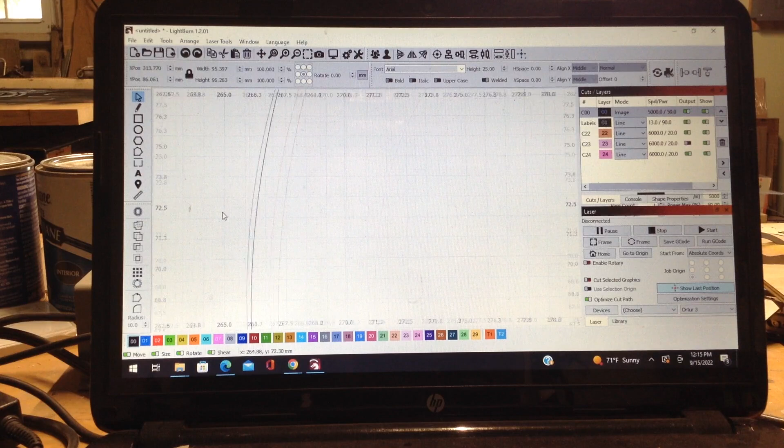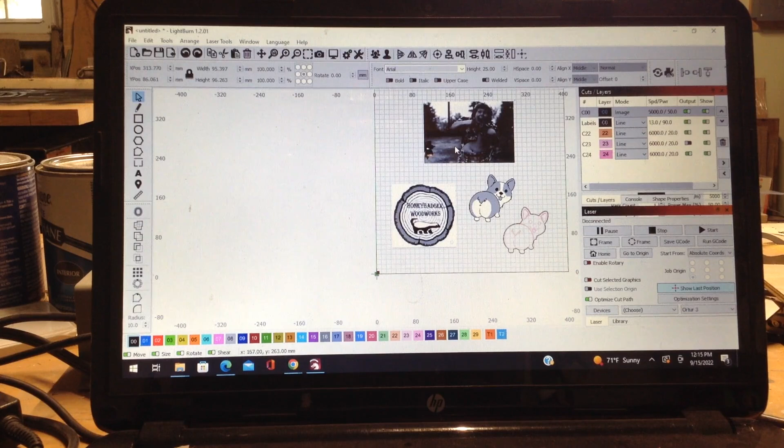This corgi I cut a little bit later, you can see when I zoom in, all the lines are smooth, there's no curves. Even on this other corgi, which is a PNG that I engraved as well, zooming in it's much smoother than the JPEG, which starts to get pixelated right about here. I did have success engraving this, mainly because it's such a simple image. But if you try to engrave this JPEG, a picture from the Goonies I just happen to have on my computer, you're going to have to do some tweaking. It won't just engrave right from importing it into the program.

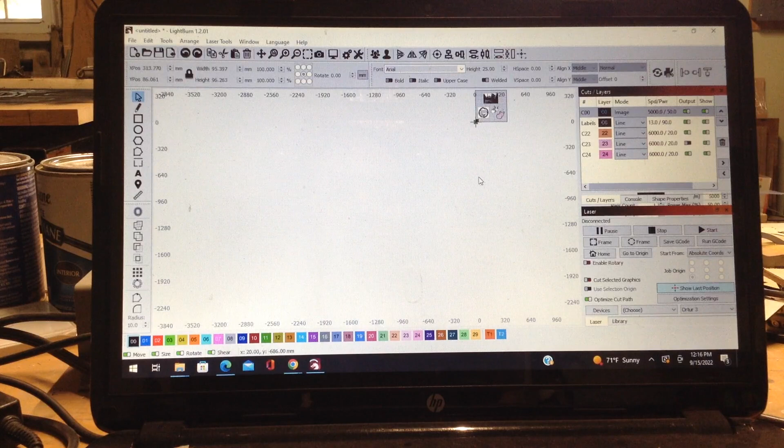But for both of these lasers, I imported this file. It has some background information which I could have deleted in Photoshop, and it came out with a very nice engraving right off the bat, no changes to it. That's basically what that looks like. So that's engraving. If you want to engrave a photo like this, I'm still getting used to the controls. A photo like this, you have to do some tweaking.

It's a little bit outside the realm of this video since I don't want it to be super long, so I'll put a link in the description to how I learned to do that. Basically that's going to be a matter of, you could do some adjustments outside the program, but you click on adjust image and play around with all these settings to get what you want. The most important setting is figuring out your resolution. If you put your resolution too high, it will blur the image; too low, it will also blur the image. For example, when I went to engrave photos, this is an example of all my tests, and it took a while to get this one, which is actually a fairly good engraving for a laser engraver on wood.

That will be in the video, and I learned all that through another rather long video. So that is basically going to be engraving pictures.

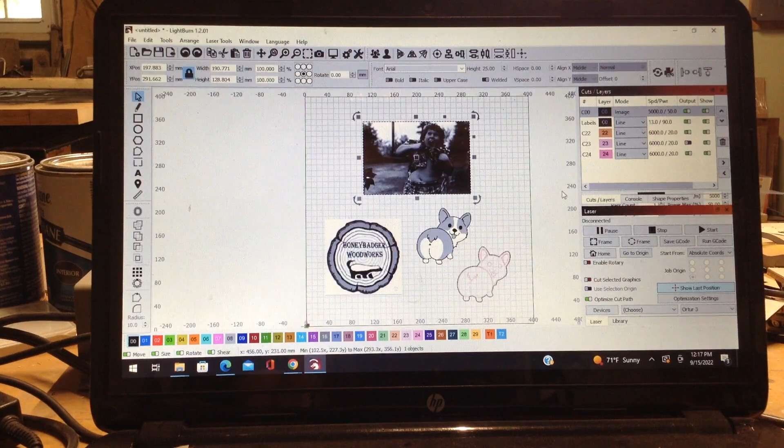So then another thing people are going to want to do is cut things out. On this image, I could double click it and then trace it. The tracing will create an outline essentially of your image. Click OK, and then there is my outline.

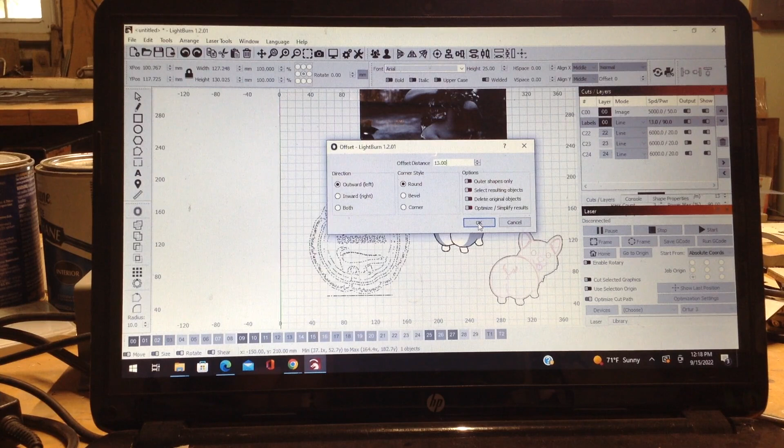From there, I could double click again, and this bigger O over here will create an offset. You could play around with all of these settings. I'm just going to click OK for the purposes of this video, and it creates this offset around the whole side.

So my cut layers is going to be a little confusing because I have all these images open. But basically what I did for this then was I clicked on my outer layer and changed it to a different color, and set that as line over here. So that will cut now instead of fill.

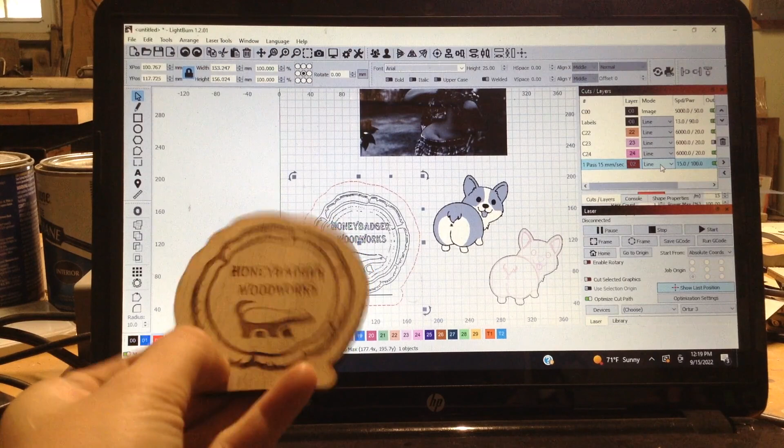And then just simply by doing that, I was able to make this. Now the engraving on this isn't as crisp as the original, and that's because this one over here took quite a bit of time to cut. So just for simplicity's sake, I lowered the detail on this one because I was mainly testing the cutout. This is 1/4 inch ply, and that worked really well.

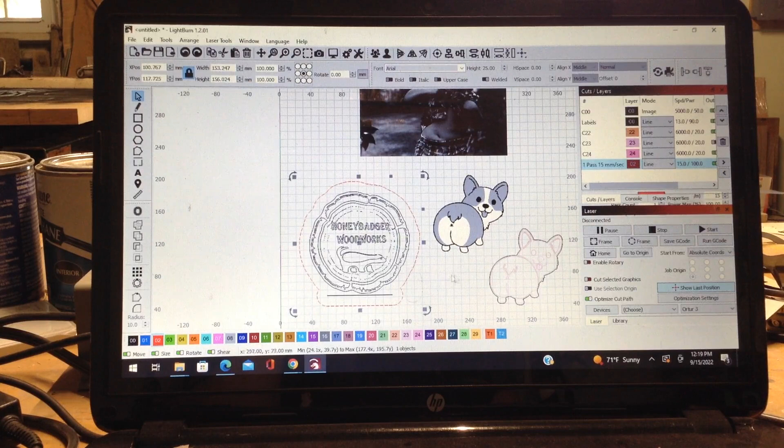So if you want to simply cut out a logo, it's pretty easy to do. So then for when I did the corgi, which you will also see in the video, I did end up engraving this image right here to get the detail, and that turned out like that.

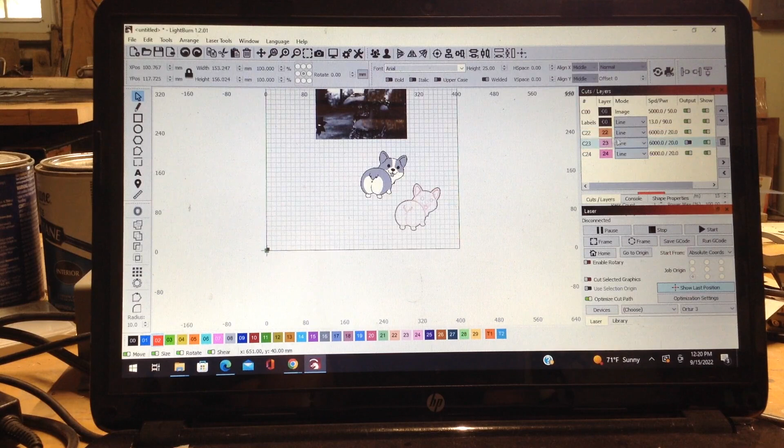But this file also came with this SVG, which is the one with the smooth lines, and you could see if I delete this and delete this, this is the information for the corgi. You could see that they have the files set up to a couple different lines.

It will cut at a couple different speeds and create that image as well. It's a little hard to see, but when you zoom in, you could see they have a very faded line creating the entire image right there. So that's basically the gist of importing images and cutting stuff out.

So a couple other things, I mentioned this in the other video. I bought this laser test file kit essentially off Etsy. It was only $4, and instead of doing this all myself, he has it laid out so that you could see all the test files. You could import them right into the program and test on all of your materials.

Every time you change a material, it's going to have to be tested to see how well it cuts, how well it engraves, and the speeds and settings for all of that. This takes the guesswork out of all of it. So you can see he has an engrave test as well, and then a grayscale test if you want to start dealing with going through multiple layers of color to reveal other colors.

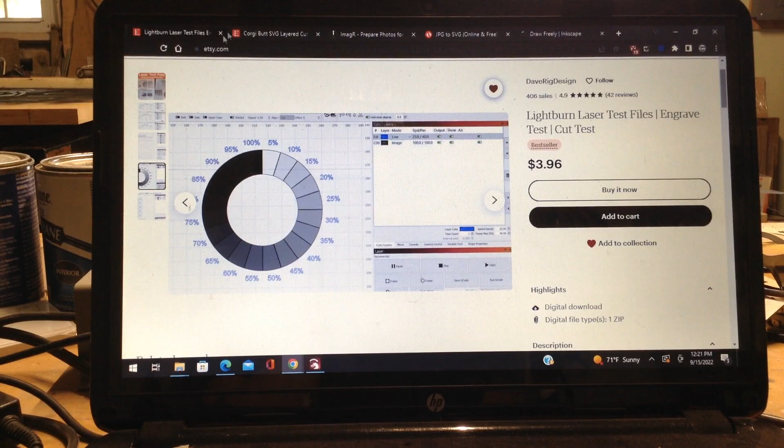Like I said, you could buy files if you don't want to get involved with making them yourself. Etsy is full of files. That's where I bought the corgi. It comes with the SVG file, make sure there's that. But like I said, the one I ended up engraving was actually a PNG.

You can get away with engraving JPEGs and PNGs if they're low detail images. If you do have an image, and I've done this with my vinyl cutter, this website, Convertio, will convert JPEGs to SVGs. You can only upload, it says right here, 100 megabytes, and then I think it only stores a certain amount for you, and then after that you have to buy the program.

But I've been able to use it for free on a couple files. It doesn't always work, and there's other ones out there that are free that I don't find work at all, but this is an option. I did this on another project where I had a JPEG and I needed to convert it to an SVG, and that worked really well.

Like I said before, this is Inkscape. This is going to be what I'm going to start playing around with to try and draw some of my own stuff, because buying images off of Etsy forever is not really going to work for me.

For now it is. But like you can see, especially with low detail images like my logo, I was able to come into this program, build the laser, come into the program, and have these initial cuttings, my logo, this cutout, and all of that in an afternoon.

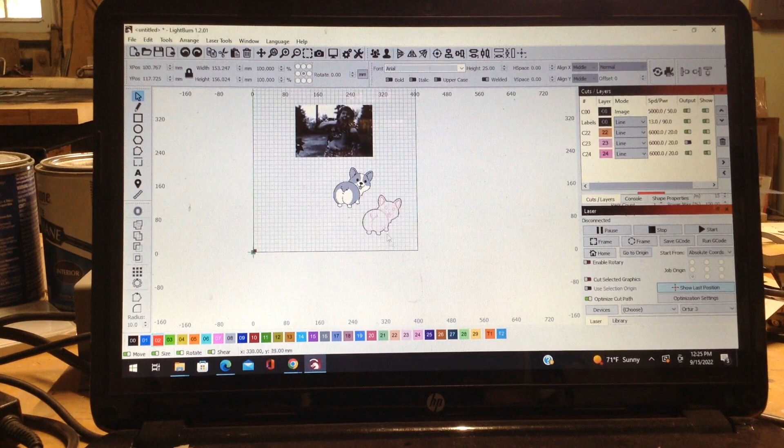So it is doable, but you can also see, even making this corgi with the multiple lines as a vector image is outside of my realm of capabilities right now, but that's something I want to change. You could get pretty advanced with how far you take this, but you can also do simplistic things without needing to know a bunch about computers.

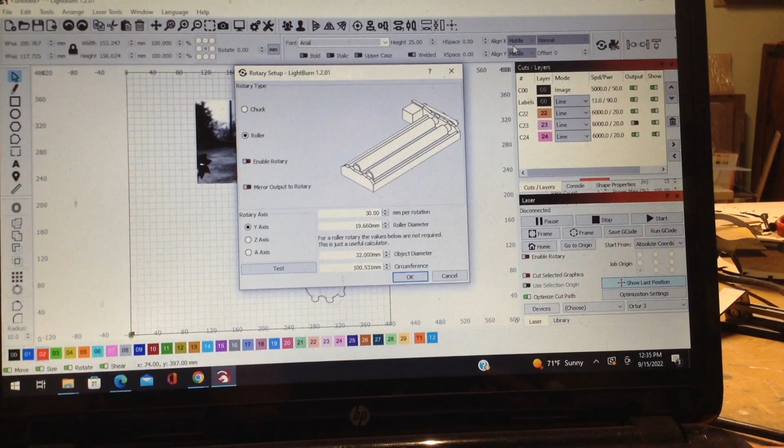It can be a rotary cutter. There's a little icon up here, and you have to enable the rotary. Luckily on the Ortur, it's just a switch that you flip, hook up the rotary tool, and flip a switch. The main thing you're going to be messing with is your millimeters per rotation.

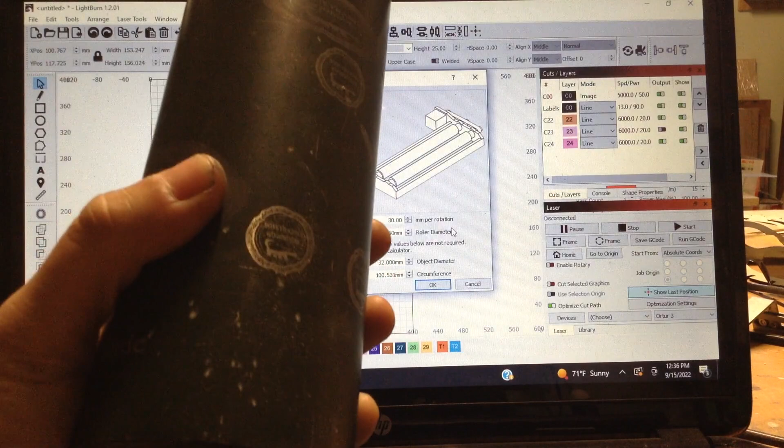If you don't get that right, you could see it had a big image, and then you can see how it stretched out here, and then finally I got it right by messing around with this number. You also need to know your roller diameter, which I use calipers to get, but once you have that set, that will be set forever unless you get a new rotary tool.

And then you need the object diameter, which is a very simple measurement, and that automatically calculates the circumference for you. Then it's just a matter of plugging those numbers in and doing a couple test cuts. That is the process in and of itself.

I'll be going over rotary cutting in the video, but once again, I'll be putting links to much longer videos. It can be a little daunting that you have to watch all these videos in order to learn the program, but there are just so many capabilities of it.

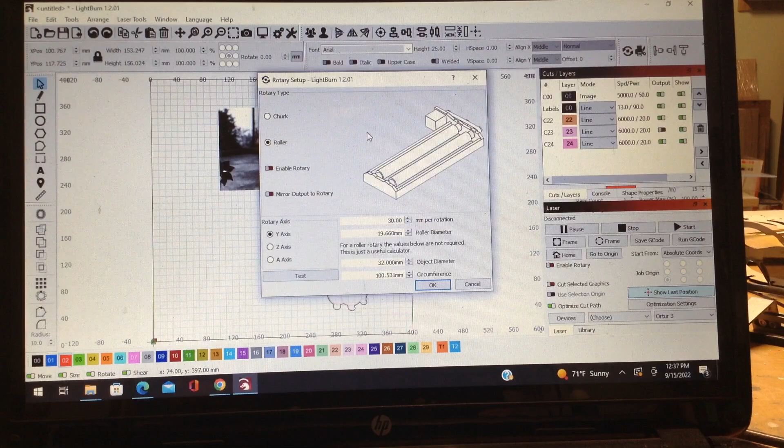I did find just sitting down and spending an afternoon with YouTube was much more useful than trying to mess around with it myself, because you have people that have gone through the process of trial and error, so that you can kind of avoid making all of these mistakes before getting the one that you want.

So I'm not going to do a big unboxing and putting this together. The internet's already full of videos showing that.

Essentially, they sent me a bunch of stuff to accompany this laser. The packaging was really nice. All the tools even came in a little box.

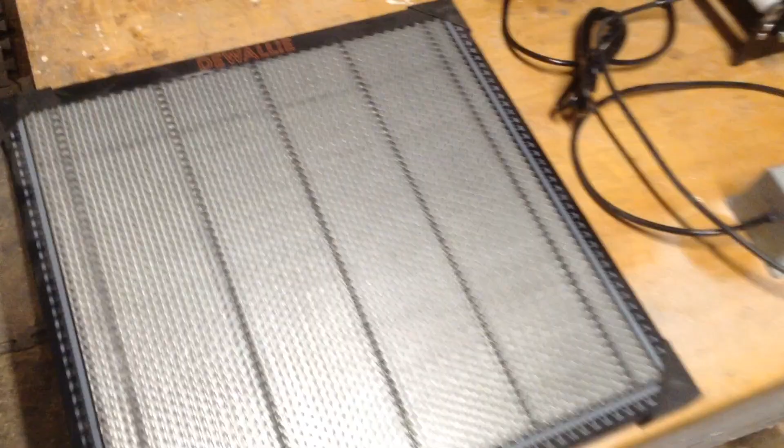All the instructions are online, just like the other laser, which I don't love. It saves paper, but when you're using your phone and your computer to try and run a program and read instructions, it is a little bit of a pain.

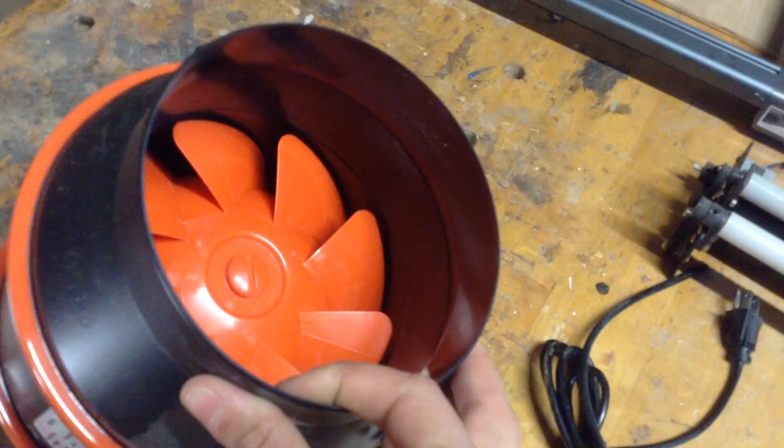They also gave me a honeycomb bed, which you need something underneath of this, especially when you're cutting. That just elevates the piece, gets air around everything, and makes it a little more efficient at cutting. You can DIY those, you don't have to necessarily buy one.

They also gave me that big venting fan, which you saw, this air assist, which gives a nicer cutting effect because it helps remove the smoke, as well as a rotary tool. So I'll be using all of this stuff in the video.

All this stuff comes with clamps and whatnot to hold it down, but I won't be setting that up yet until I permanently decide where I'm going to be putting all of this stuff.

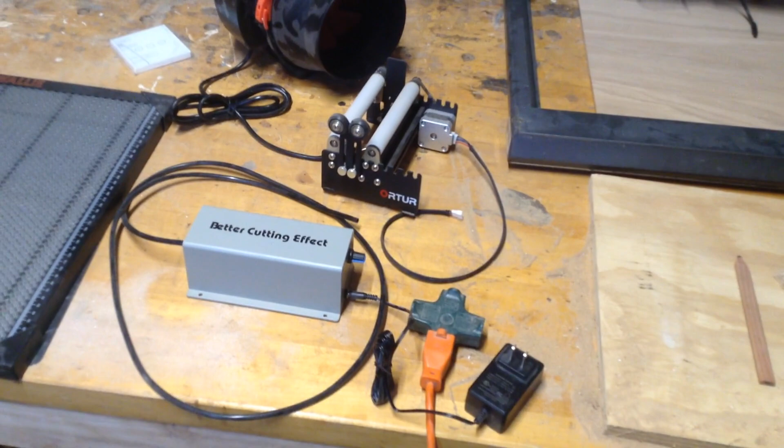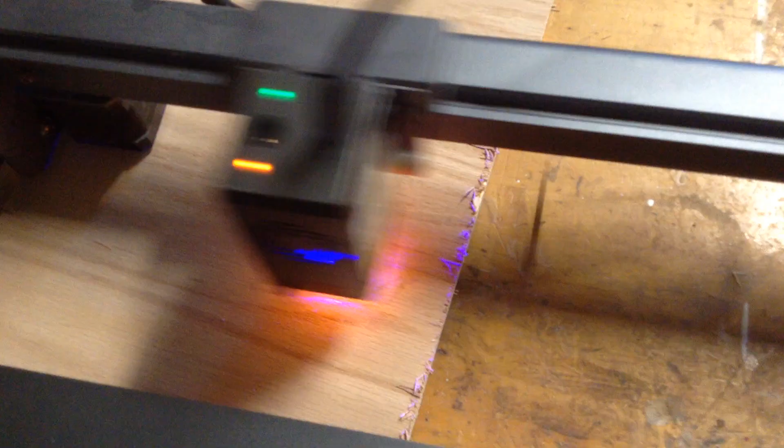So like I said, this is initially starting the piece. Unlike the other laser, this one actually has a homing setting, which was nice, but I basically just imported my logo and started engraving. As you can see, the settings I originally had were not dark enough, but it did engrave the image. So this was really where I started learning and processing information, because I knew it wasn't going to be as easy as just importing any sort of file and making whatever I wanted.

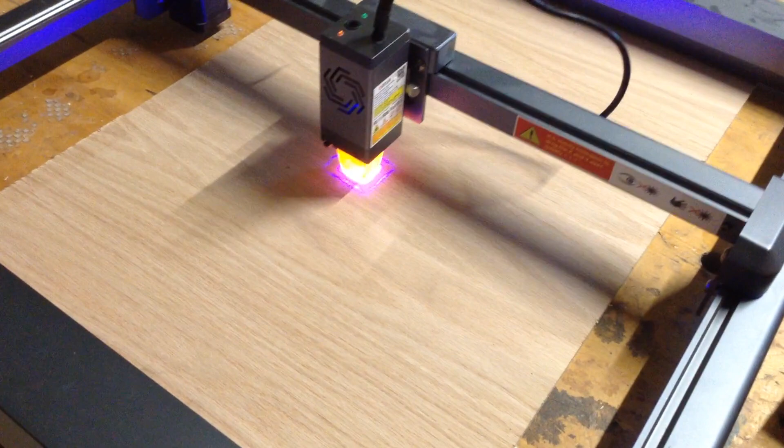So in the program, they do have a material test that you can use. That is what I used at first. I did upgrade to that Etsy program I showed you, because it does test a couple other things. But these initial settings were really useful to get me up and running.

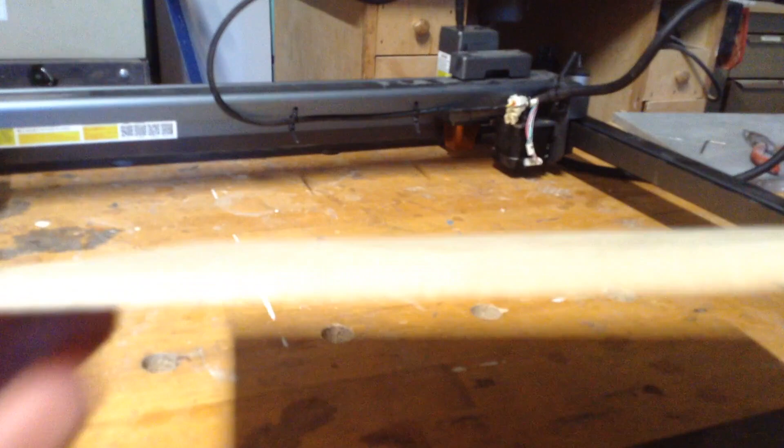You can perform the test on the tool. You could see it shows you what power and what speed to set, and then that will help with the initial settings. I tried it on birch and pine as well, just to kind of get an idea of how this would work.

Obviously the pine, because it's the softest of the three woods, you can see there's a little bit more of the grid showing up, but in general they were all quite similar.

Like I said in the last laser video, a lot of this is just going to be fine-tuning your settings. Those are going to be specific to the program you're using, what you're cutting on, as well as your laser. So I'm not going to input a ton of information here about my settings, because they might not necessarily work for you. But with those tests, or the tests I have on Etsy, you can set your initial settings.

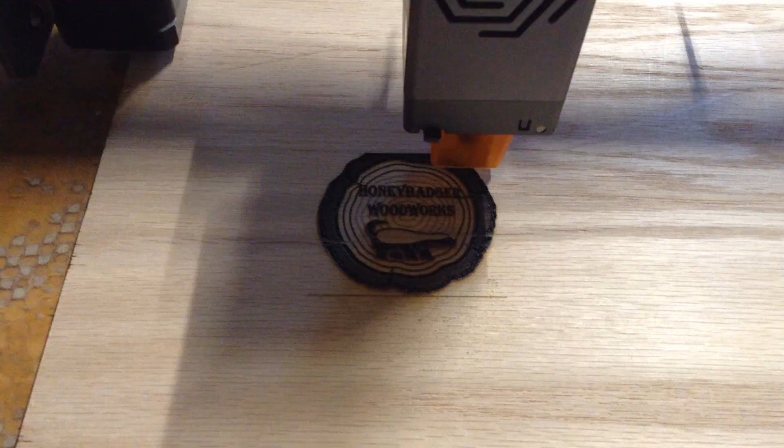You'll see the difference between running that test and then engraving that logo is huge. Obviously this is oak I'm engraving on, so the grain has a lot of texture, so that shows up in the pattern.

But in general, I was really surprised by how well this worked and how much detail it did actually render. So then, like I said in the intro, the next thing I wanted to do was test on cutting, because I am planning on cutting a lot of stuff on these machines. So that was just a matter of tracing the image and then making an outline for it.

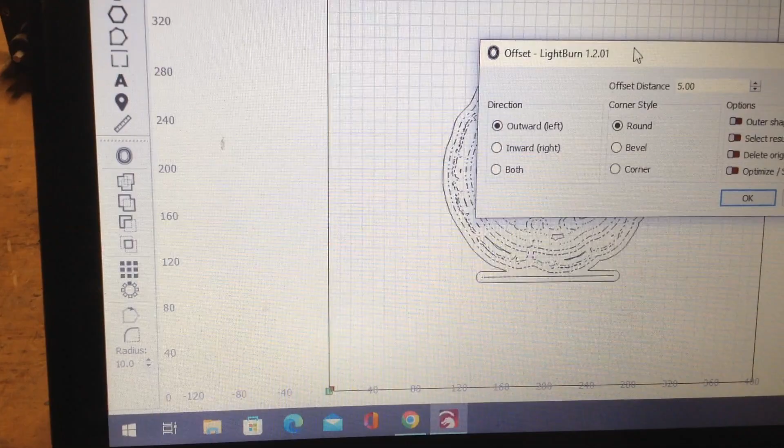The traced image will be a fill layer, so it will still be engraved. And then on the outside, this offset I'm creating, you could see how you could play around with the offset to get the look you're after.

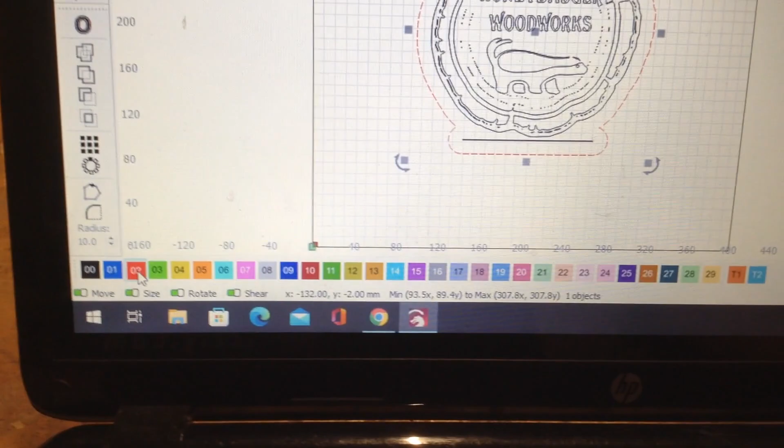And then I could change that offset to a different color, and it will cut that offset as a cut line if I set it to line. So once again, really simple, easy settings. You can see one's line. I'm going to change the interior stuff to fill, so that will be engraved.

And then I removed some of the detail in the program in this so it cuts a little bit faster. These machines are really cool, but even small engravings can take upwards of a half an hour to do. So I did remove some of the detail, using the framing button, which I'm getting used to, to frame out where this is going to cut. And then I could go through and do that.

Obviously, you always want to engrave before you cut. So there's the engraving, and then the cut layer will go on the outside. So these were the first two things I did in the laser.

It's funny because the laser mark is actually so small. I really didn't think that this plywood had cut through at all. But if you push on it, obviously on the bed, to make sure it went through before moving it, and that's what it looks like.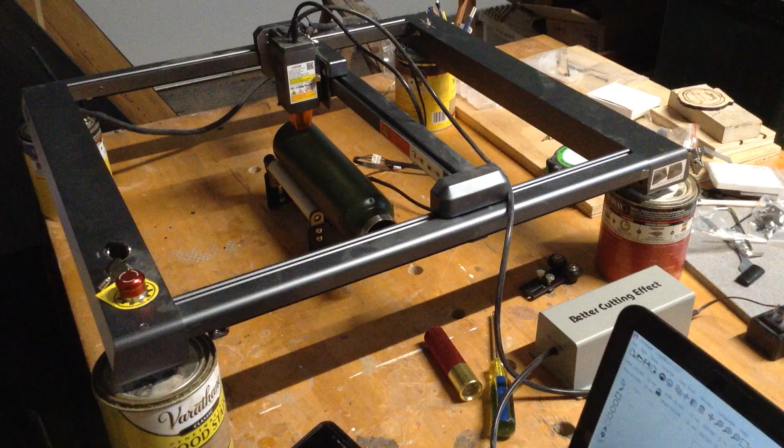So for the rotary tool, I have to raise this. I do believe they make risers, but it's just easy enough to use paint cans for myself. This one's really nice. It has the accessible plug in the back with the switch to flip.

And then basically, like I said, I opened this window box, imported all my numbers based on what I was using, and went from there.

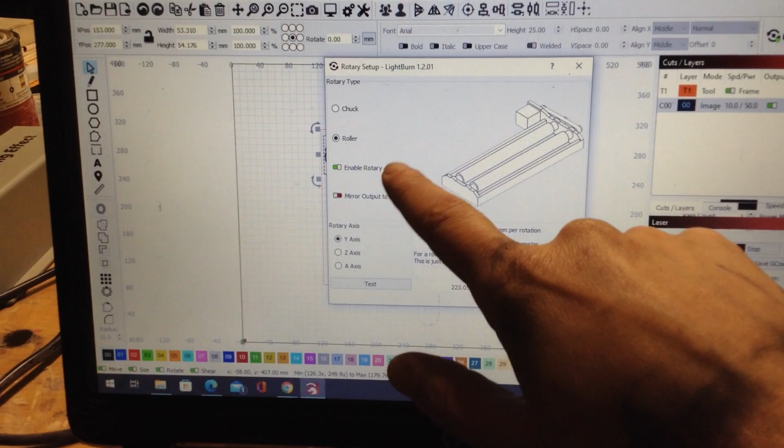Now the rotary tool setting I did have a problem with at first because I watched a video that was recommended where he went through and changed a bunch of settings. I'm going to put that one in there because it's kind of the video that everyone recommends, but I'm also going to put one in there with a woman who just kind of went through and did it much quicker, and that worked for me as well.

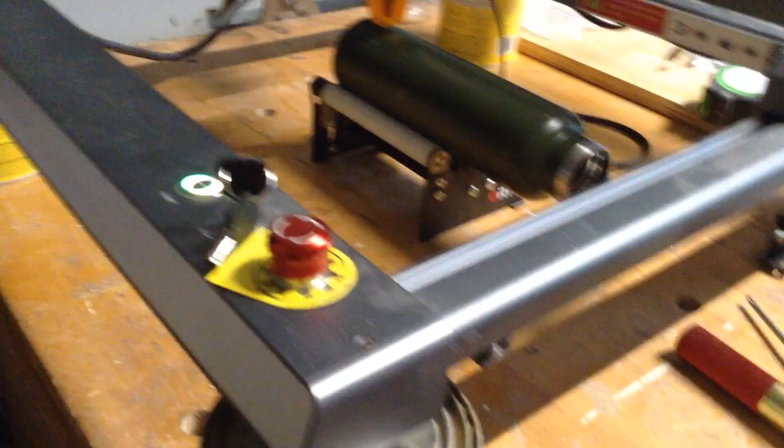When I went through and changed a bunch of settings, I had a problem with getting the machine to rehome, and I had lots of issues with errors. So in order to do this, all I did is what I showed you. I plugged it in, I changed all of my numbers, and I was able to engrave.

Now obviously this was the number I didn't have accurate, the millimeters per rotation, which was why this was coming out distorted at first. But after I figured that out, you could see I kind of did a bunch of tests to narrow in on that number. And then once I finally got that, which will change based on what you're doing, I got a pretty solid engraving on here, as you can see.

There was a little bit of a learning curve with the rotary tool at first, but the second and third time I used it, it was much easier to set up. And it's pretty cool, the clarity of these images.

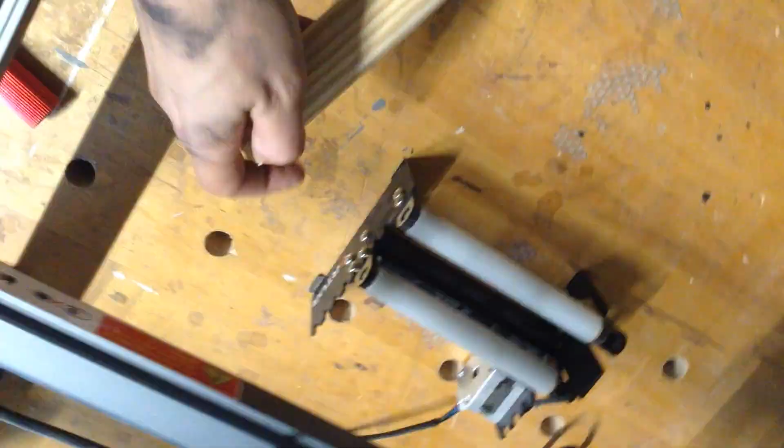Since I had it set up, and I apologize, I didn't realize at the time that this was upside down, I wanted to try doing the same thing on wood, because there's a little bit of a template you have to import into the program. I'm not going to get into all of that. You could watch that other video if you wanted to get more in depth on rotary engraving, but all I did was change the diameter and circumference numbers, and I was able to replicate the exact same thing on a dowel. Did a smaller one, but grain's going to be your big issue on wooden pieces, so that's why I moved it.

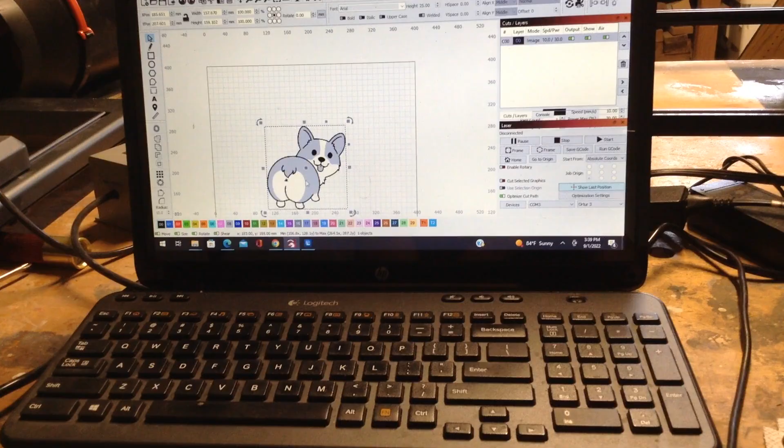So then, like I said, I brought this corgi because I wanted to make a QR code for the Wi-Fi. This was a quick, easy project that I had already wanted to do, and you could import images. You could type in the program like I'm showing right here, and very quickly make a template to cut out. And then the QR code is generated on my phone.

So this is in real time, just giving you an idea of how slow the machine has to move to generate these images. That's the QR code. Obviously I'm covering that up because I don't want everyone to know the password, but it does work, which was pretty neat.

So this was a test piece I did on oak. I changed a couple of things, and then printed it on poplar, which I'm having really good success with because the grain is so much more fine than other lumbers. You could see that's the minor changes I made.

The engraving, this took about 45 minutes just for one of these, so it does take a little bit of time. Then, like I said, you can do images.

I'm going to put some links to how I learned how to input images, because with more detailed images like this, if you just input them into the program, the first time I did it, it turned out pretty much all black. So there's a lot of tweaking to be had. Printing these on organic materials, you're always going to get a little bit of a blurry, pixelated look. It's just the nature of the material. But if you hone in on the settings, which, like I said, I learned in that video, I was pleasantly surprised with the detail you're able to get with importing a JPEG image into this.

And that's basically what that looks like as well.

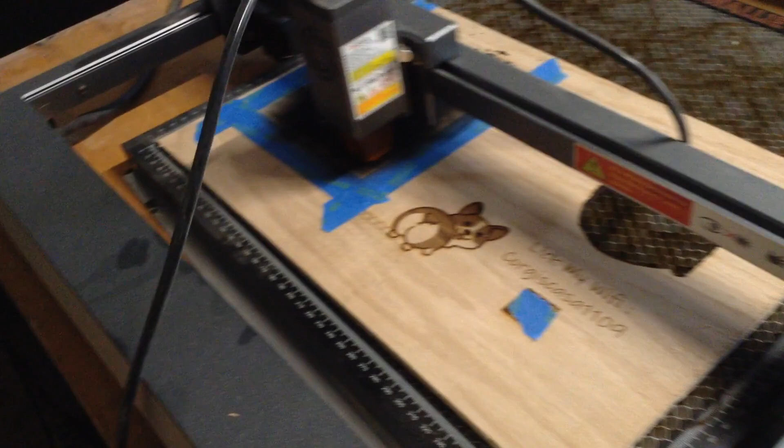So then I wanted to try aluminum as well, but I was doing some reading about it, and you don't want any sort of super reflective material because the beam can reflect back into the laser and damage it. So I had some aluminum flashing laying around, and there was a guy who simply used a matchstick to create ash on the aluminum. I know they make a special chemical you could paint on there, but it's a little bit expensive. So I just did that soot basically on the flashing, and then once again with the logo.

The engraving for this, I don't have the aluminum settings figured out yet, so it is a little bit of a fainter engraving once you remove that soot, but it's still pretty cool seeing all the stuff you can do. I know people have done plastics and leather and stuff like that as well.

So I know that was a lot of information, and I'm going to kind of end this abruptly here, but I did want to put some footage of the project I built with last week's video just to give you an idea of what these are capable of.

So then next week, because I didn't want this video to be 45 minutes long, I will be uploading another lampshade build because I have 2 lamps, but I'm going to be doing 2 completely different shades. But you can see that the possibilities are pretty much endless with these machines. I know these 2 reviews are more informative than anything else, but I really want people to get an idea of not only what they're capable of, but what is going to be entailed with being able to use the program and the machine.